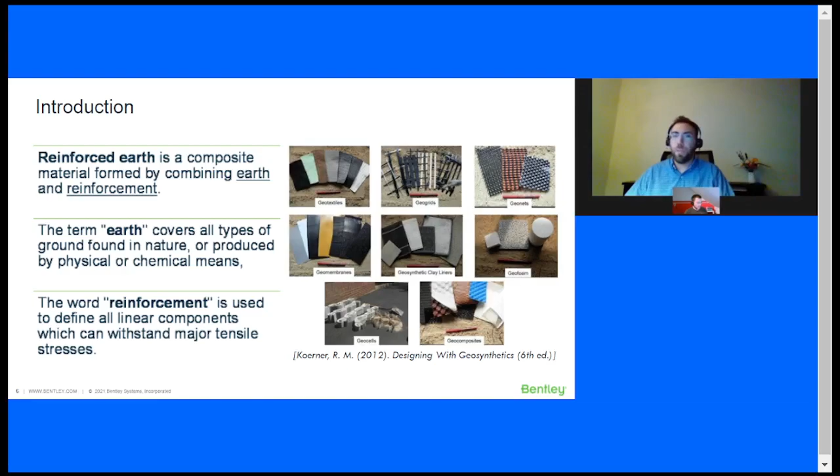One might assume that geosynthetics and their use are fairly new to the world, but that's very far from the truth. In fact, there are many findings that suggest inclusions of different materials mixed together with soils have been used for thousands of years by ancient civilizations. For example, Romans used natural fibers, fabrics, or vegetation mixed with soil to improve road quality, especially when roads were built on unstable soils.

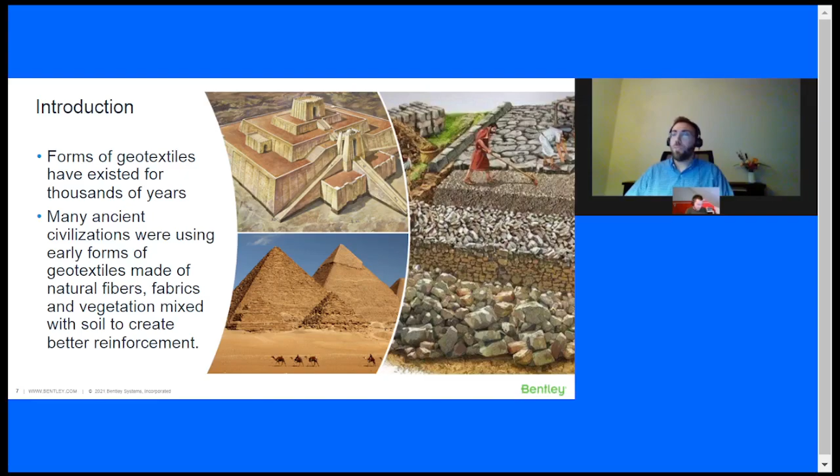The same was true for the Egyptians back in the days of the pharaohs, where they used woven fabrics to stabilize roadways and also incorporated straw mats in the foundations of their pyramids. Finally, the Babylonians, more than 3,000 years ago, used reinforced earth to build ziggurats. The story goes that one of the most famous ziggurats, the Tower of Babel, collapsed perhaps because it was not properly reinforced.

A fundamental problem these ancient civilizations faced was using natural materials such as wood and cotton. In a buried environment, they faced an issue called biodegradation, meaning microorganisms in the soil were slowly eating away these natural materials. Luckily, this problem was solved in the middle of the 20th century with the coming of polymer materials, which we know, when properly formulated and manufactured, can last for centuries even in harsh environmental conditions.

Since then, the usage of geosynthetics has increased rapidly in many fields of civil engineering, including geotechnics. The global market is expected to reach $22 billion by 2027. In terms of product, geotextiles dominate the global geosynthetic industry with over 70% of volume.

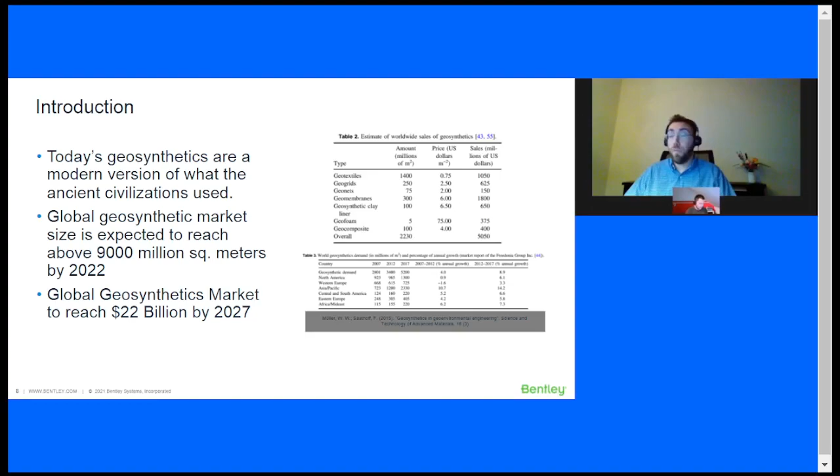As you already know, geosynthetics have many areas of application in civil engineering. They always perform one or more basic functions, as shown here, when used in contact with soil, rock, or any other civil engineering material. These functions are separation, filtration, reinforcement, barrier or containment, and drainage. As shown in the table, for any given application of a geosynthetic, there can be one or more functions it is expected to serve during its performance life.

In PLAXIS, the primary function that we typically model is reinforcement, shown here in darker green. In reinforcement, the geosynthetic develops tensile forces, and this development is intended to maintain or improve the stability of the structure. However, it is also possible to model barrier or drainage functions, but that could be a bit outside the scope of this presentation.

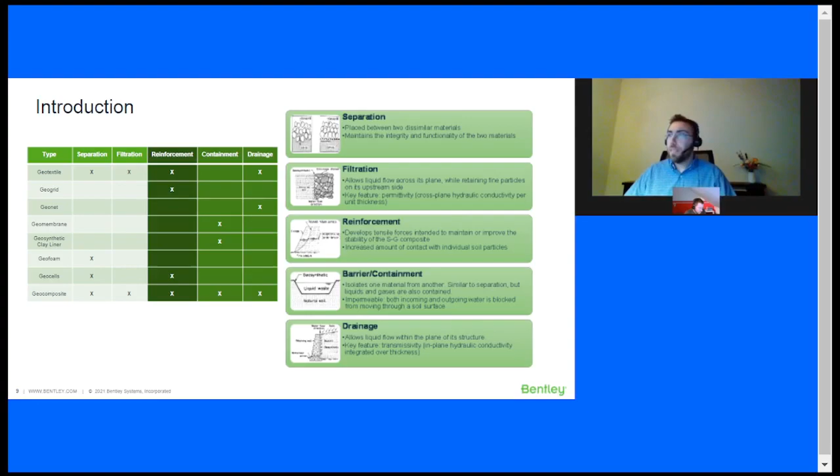With that, I'd like to ask you this question: if you are designing with geosynthetics, which functions are most commonly used for your design? The available options are separation, filtration, reinforcement, containment, drainage, or maybe some other. You can choose multiple answers if you want, and we'll check the results in the next slide. I'll give you a few more seconds to answer this.

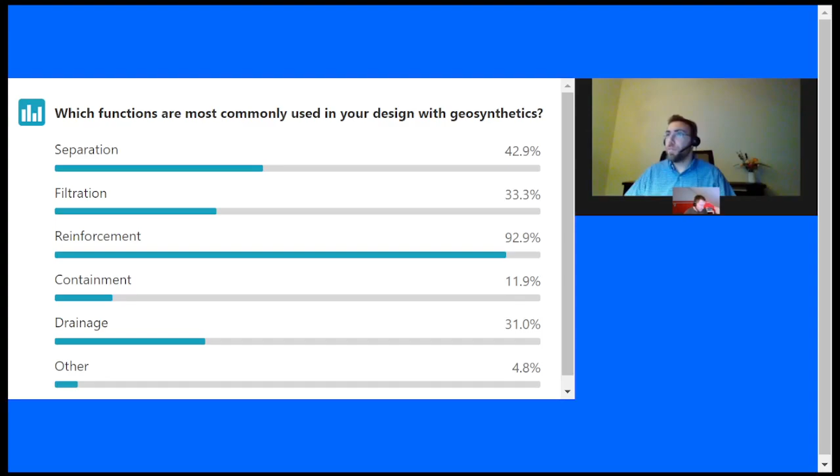Of course, reinforcement is the easiest function to model in PLAXIS, but as we said, we have other functions as well. Let's check our poll results. The majority of answers selected reinforcement, but we also have some high percentages for separation and drainage. We're going to see some of these applications afterwards. These are some nice results.

Let's see some common applications in civil engineering projects. The application areas of geosynthetics are numerous. One such application is retaining walls, or what we know as mechanically stabilized earth walls. Geosynthetic reinforced retaining walls consist of different geosynthetic layers as reinforcing elements, installed in the backfill to help resist lateral earth pressures.

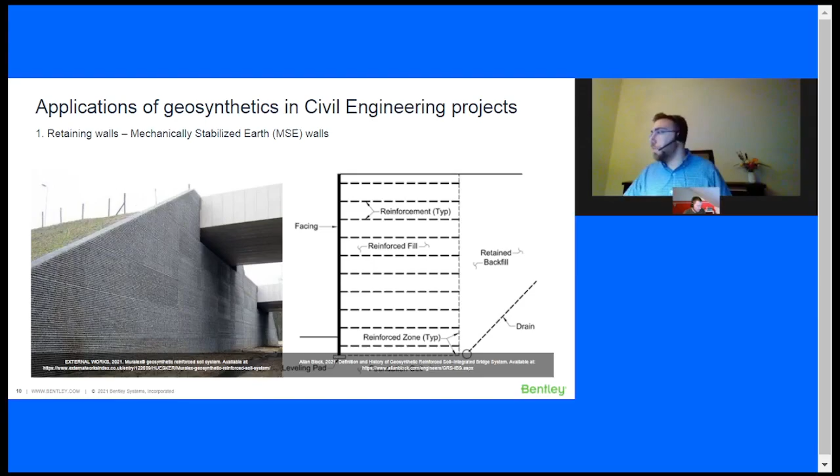The geosynthetic reinforced retaining wall has three basic components. First is the backfill material, usually a more granular soil. Second is the reinforcement layers, generally geotextiles or geogrid layers, though you can also encounter metallic strips. Last but not least are the facing elements, which are not actually necessary, but are used either to maintain the appearance of the wall or to avoid erosion between the reinforcement layers. We will demonstrate one such example later after this presentation.

With that, we can move on to embankments and slopes. As you may already know, the construction of embankments over weak or soft soils can really become a challenge for geotechnical engineers. In the conventional method of construction, we usually first replace the soft soil with a more suitable material, or else we improve it in one way or another.

This improvement can be done, for example, with preloading, with dynamic consolidation, with soil mixing or grouting, or maybe with pile foundations. Of course, these options can be time-consuming, costly, or both.

On the other hand, in slopes, we know that many of the stability issues that we face in most of our designs are usually related to the requirements to meet steep grades without having to construct a retaining wall. In the end, what we want is to reduce the land requirements and provide additional usable area near the crest and the toe of the slope.

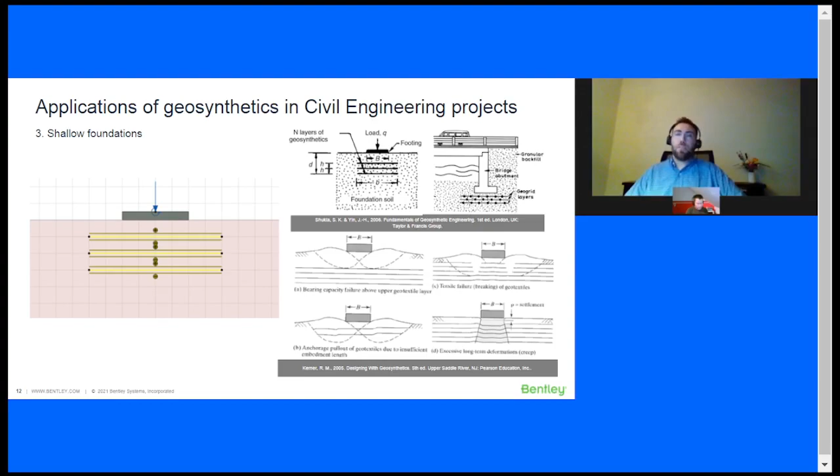Now, moving on to the shallow foundations, we know that the geosynthetic reinforced foundation soils are being used to support foundations for many structures. These structures can be footings, bridge abutments, platforms, heavy equipment, etc. In usual construction practice, one or more layers of geosynthetics are placed inside the controlled granular fill, which goes underneath the footing.

Now, the benefits of reinforced foundation soils are, first of all, the improved load-bearing capacity, and secondly, the reduced settlements. This happens because the imposed loads are distributed over a wider area. And normally, if we didn't have geosynthetics in conventional construction technique, we would need to have a thicker granular material, which can be costly or maybe sometimes not even possible in sites where the availability of granular materials is not easy.

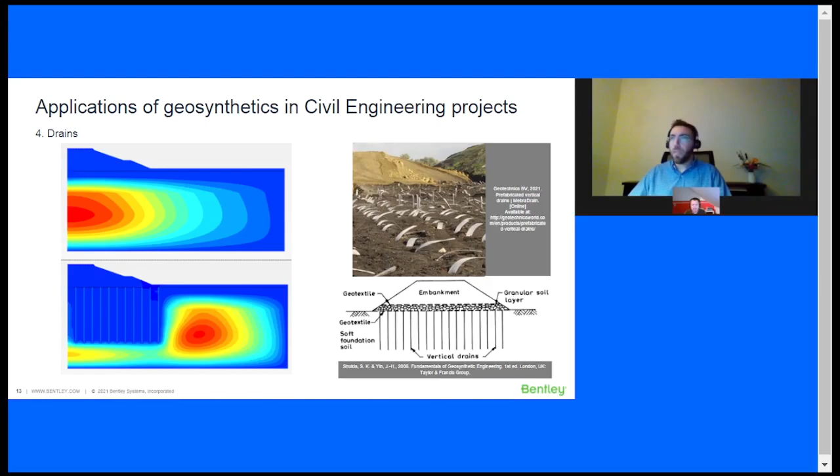And with that, we can move to the more practical part of this presentation, which is the determination of parameters. We know that by definition, the geosynthetics have a slender structure, which means that they can only sustain tension, tensile forces, but not bending or compression. Therefore, it is important to know the tensile properties of our material.

Tensile strength is usually determined by some sort of tensile testing. The most common one is the wide width strip tensile test, where we are gripping a geosynthetic specimen in the jaws of a tensile testing machine. And then we start stretching it in one direction at a prescribed constant rate of extension until that specimen breaks, or as we call it, ruptures.

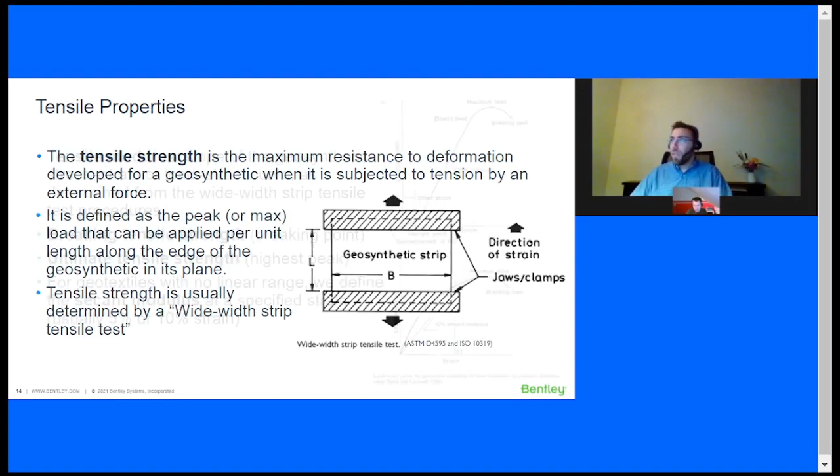Of course, we have many other tests that we can use. We have the grab test, the biaxial test, the multi-axial test, the plane strain test, etc. Now, during this extension process, we measure both load and deformation, and therefore we can derive at the end of the test some important parameters, such as the peak strength, the elongation, and the tensile modulus.

So starting with the tensile modulus, we know it needs to be considered in our design. Why? Because the geosynthetics need to actually resist tensile stresses under deformation. By definition, the tensile modulus is the ratio of the change in the tensile force to the corresponding change in strain. This is equivalent to the Young's modulus as we know it in other structural materials, such as concrete or steel.

You can see here on the top right, the figure shows a typical load strain curve for geotextiles. The tensile strength corresponding to the breaking points and the highest peak point are called the breaking tensile strength and the ultimate tensile strength, respectively. The slope of the load strain curve is the tangent modulus. And what we see here as offset modulus, which is on the linear part, is actually the maximum value of the tangent modulus, and it is obtained by calculating the tangent on the linear part of this slope.

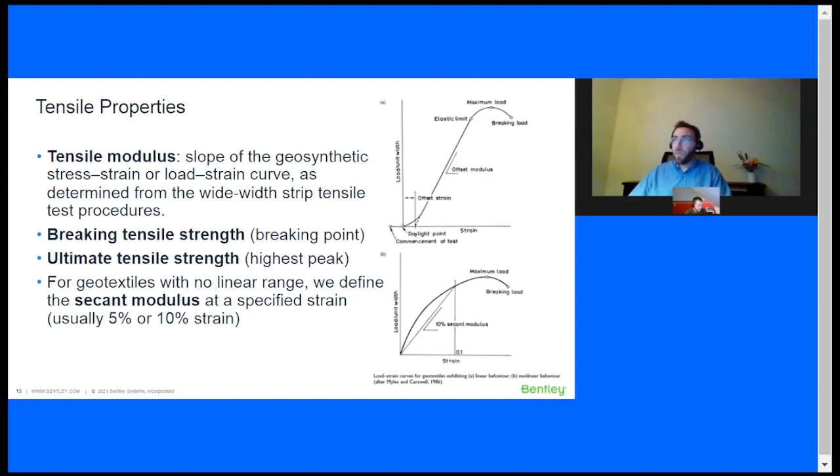Now we need to translate all this into what we use as input in PLAXIS. When we create a geogrid material in PLAXIS, we need to define a few parameters. The first is the material behavior. We know that a geogrid can be elastic, elastoplastic, or viscoelastic.

The second parameter is the axial stiffness, EA, which can be acquired either by testing, as we saw earlier, or from the product specifications. Usually, manufacturers provide material specifications for the product, and the properties are expressed as tensile strength, Tmax, and the elongation at failure. In that case, the axial stiffness will be equal to the tensile strength over elongation.

Last but not least, the third parameter is the allowable axial tension force in case of an elastoplastic material. When we are designing with geosynthetics and we want to consider its long-term strength, this property must be taken into account.

So what we traditionally do in our design is use a factor of safety approach. For example, for reinforcement applications, design codes use equations similar to the first equation we saw here, where we estimate the allowable long-term tensile strength by dividing the ultimate tensile strength by several reduction factors representing the soil, the strength loss due to installation damage, creep, and degradation, usually due to chemical or biological processes. For analysis procedures which incorporate the design factor of safety directly into the reinforcement, we use equation 2.

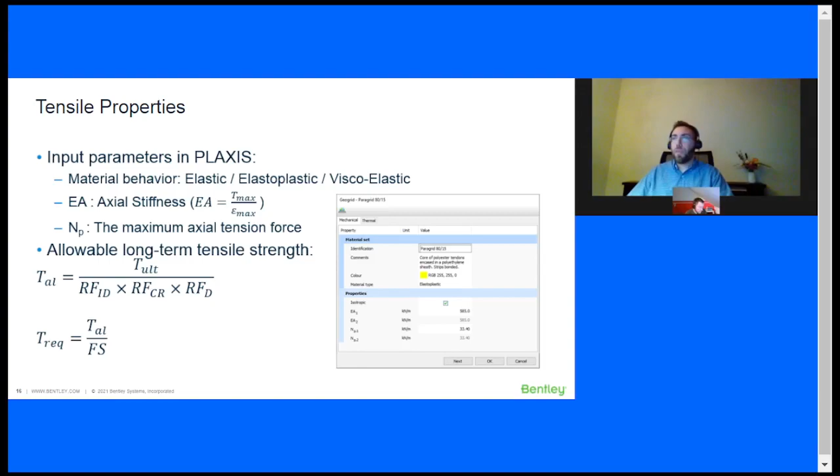Now let's talk about the interaction that happens between the soil and the geosynthetic. This interaction is really important, and we consider it a key element in the performance of the geosynthetic reinforced soil structure. It is important because the interface is mainly responsible for the transfer of stresses from the soil to the geosynthetic. In particular, for geogrids, we have 3 different interaction mechanisms that could be mobilized at the interface.

The first one is the friction that happens between the soil and the solid surface. The second is the passive resistance mobilized against the bearing member. And thirdly, as also shown here on the right side, it is the friction happening between the soil enclosed, meaning the soil in the gaps, in the openings of the reinforcement, and the surrounding soil.

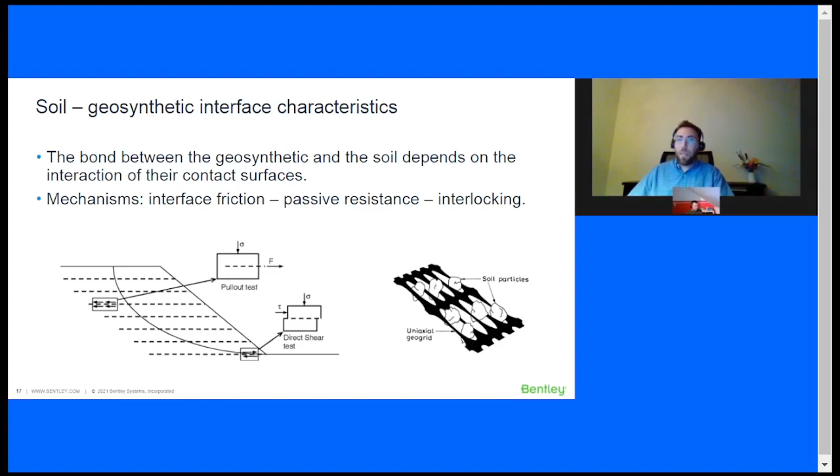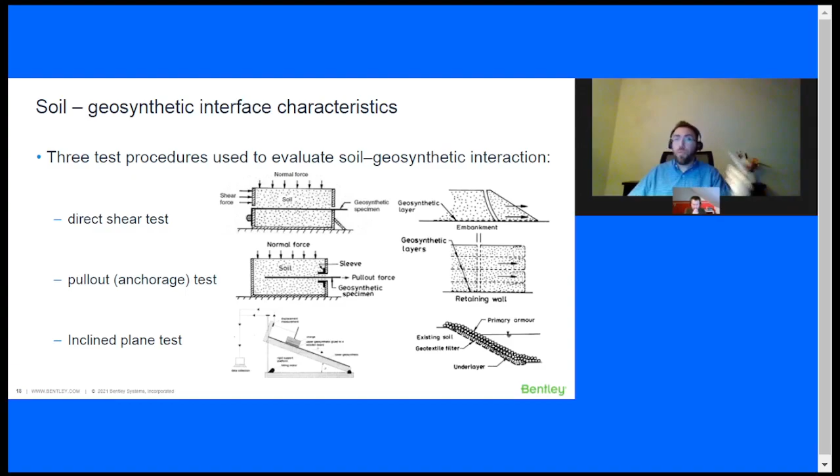Now let's apply this to our PLAXIS input. As you may already know, when we define a Geogrid, we can also create an interface that goes with it. Usually we model the roughness of the interaction by choosing a suitable value for the strength reduction factor, which most of you know as R inter. We do that by specifying a value at the interface subset of the material set that we have assigned to the surrounding soils.

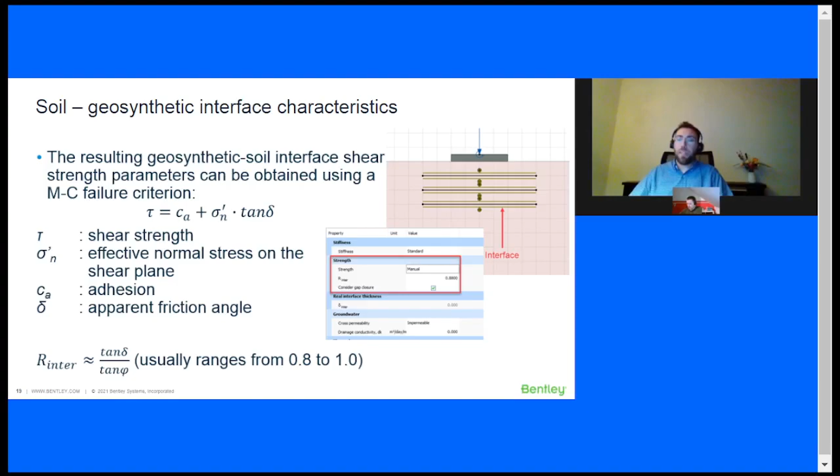Now, in PLAXIS, the shear strength parameters of the interface can be obtained using a Mohr-Coulomb strength failure criterion. However, in this case, instead of a friction angle phi and a cohesion C, the strength parameters are expressed in terms of apparent friction angle, delta, and adhesion, Ca. These are parameters determined with the tests we mentioned earlier. Therefore, the strength reduction factor becomes almost equal to the ratio of tangent delta over tangent phi, which some of you may already know from geosynthetic design as the efficiency of the geosynthetic.

Now, having said that, we understand that determining the correct parameters for our geosynthetics and their corresponding interfaces is really important, as we said, it's a key element. I'd like to ask you: in your designs, how do you usually determine these parameters? Is it through field testing, lab testing, or from the manufacturer's product specifications? Or maybe something else? We'll show the results later, close to the end of the presentation. I'll give you a few more seconds.

I know that the first two options are sometimes costly, so people tend to use the product specifications. I'll leave you a few more seconds, and then we can move on to the final part of the presentation.

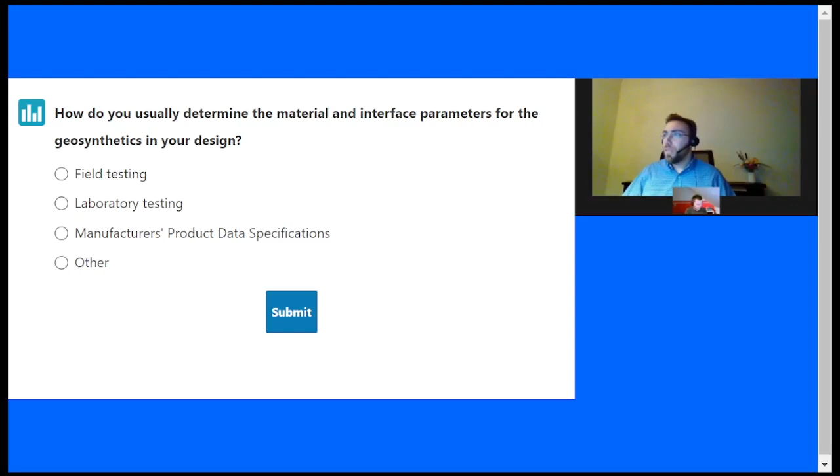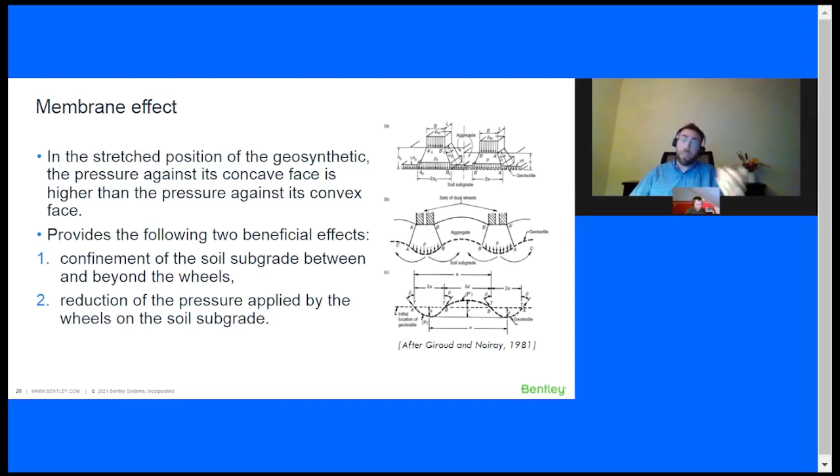The final part talks about the membrane effect. To explain it, consider a geosynthetic loaded laterally by a vehicle. On application of the wheel load, the geotextile exhibits a more wavy shape and starts becoming stretched. In this stretched position, the pressure against the concave face is higher than the pressure against the convex face. We know this mechanism as the membrane effect of the geosynthetic.

In short, geosynthetics that are initially straight may become curved due to lateral loading, and the higher the strain level in our analysis, the more apparent this effect becomes. To take this curvature into account and ultimately calculate the axial forces correctly due to the membrane effect, we need to activate the updated mesh option in the numerical control parameters. In simpler words, the updated mesh moves the nodes in the mesh to the new deformed location in every calculation step, then continues from there. This is different from the normal analysis, where deformation is always calculated relative to the initial, undeformed mesh.

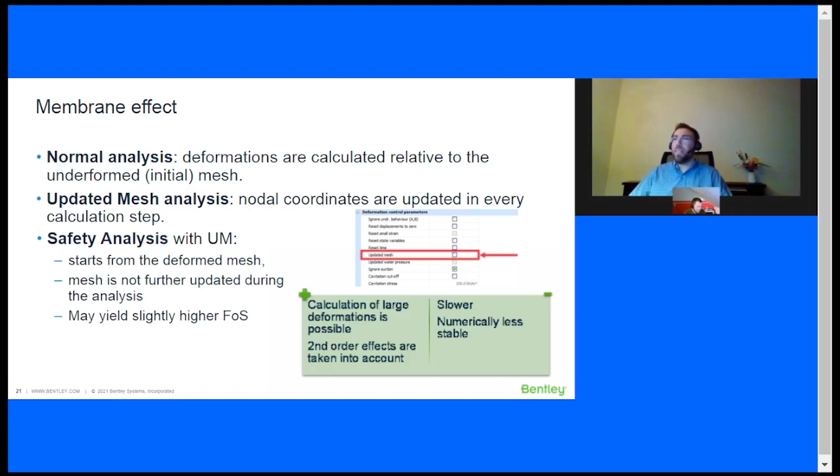Although an updated mesh is usually recommended for geosynthetic analysis, especially when lateral loading is present, due to the extra step of updating the nodal coordinates it can become slower, and sometimes numerically less stable. Finally, in a safety analysis, due to the consideration of the updated mesh and the more accurate mobilization of strength for the geosynthetics, the analysis could possibly yield slightly higher factors of safety.

With that, we can now see the poll results. As we can see, the majority of our attendants selected the manufacturer's product data specifications, which is expected. I think it's both easier and cheaper than performing lab tests.

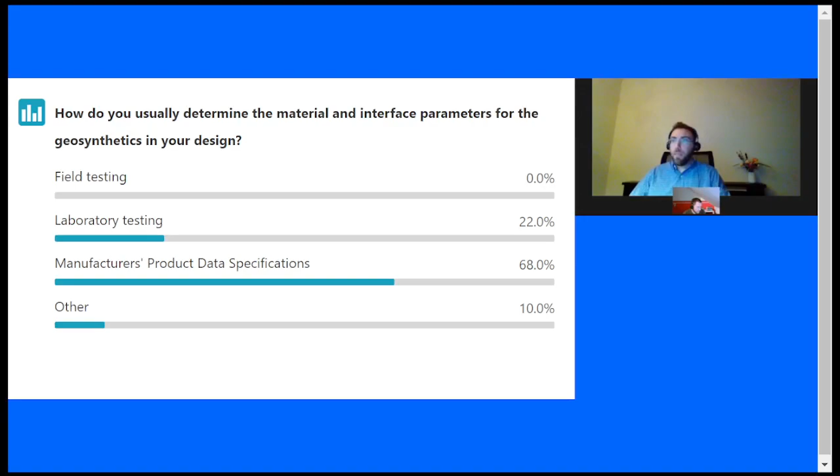And with that, we can now move to the second part of the presentation, which is the live demonstration of the design of a mechanically stabilized earth wall. So let's start with that.

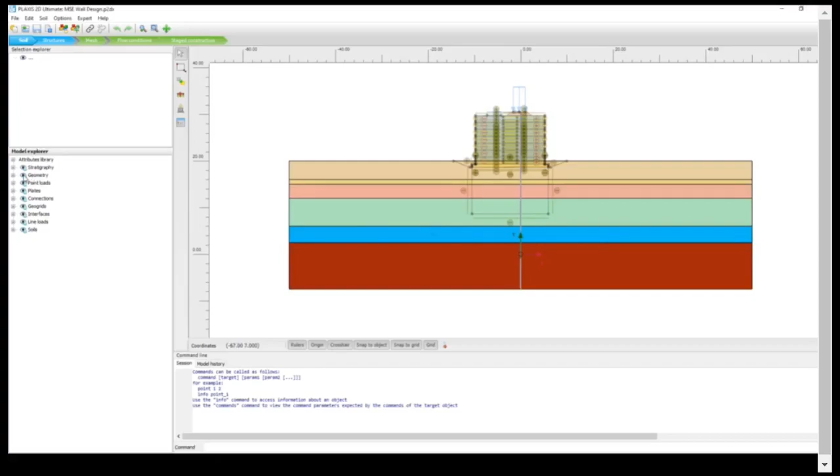All right, so we are starting our journey in the soil mode. Let's hide everything and keep only our soil layers. Here we have some mixed soil conditions with silty, sandy clay on the top 4 to 5 meters, followed by a clay sand and the silty sand. We also know that the phreatic level is approximately 3.5 meters below the ground surface.

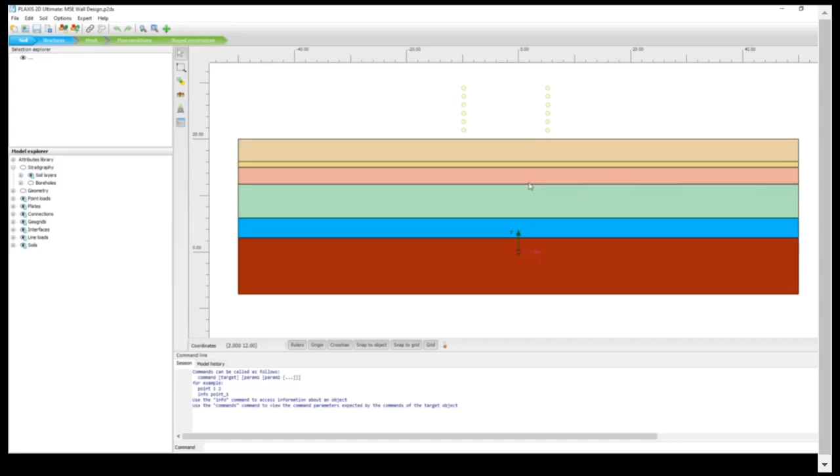Now, as this is a very soft ground, we suspect it won't be able to sustain the loads of the retaining wall we want to build on top. Therefore, we've decided to improve its mechanical properties in one way or another, which we'll show later. Now let's move to the structures mode. Here we can define the geometry for our problem. So let's show everything and then hide the lines and the points.

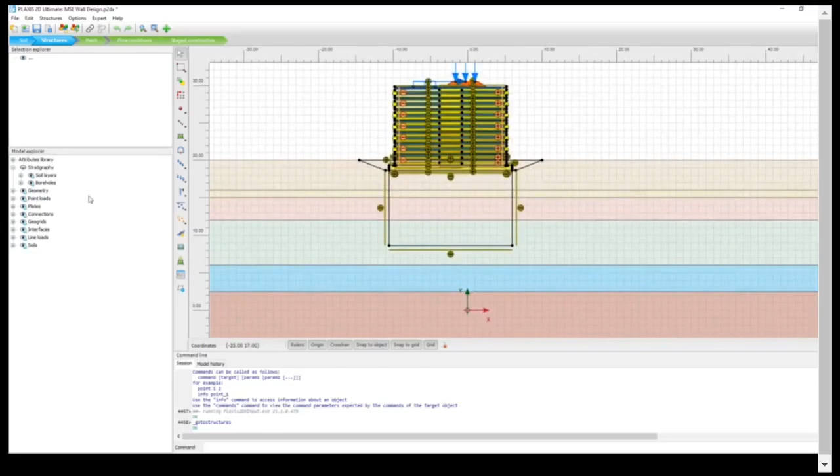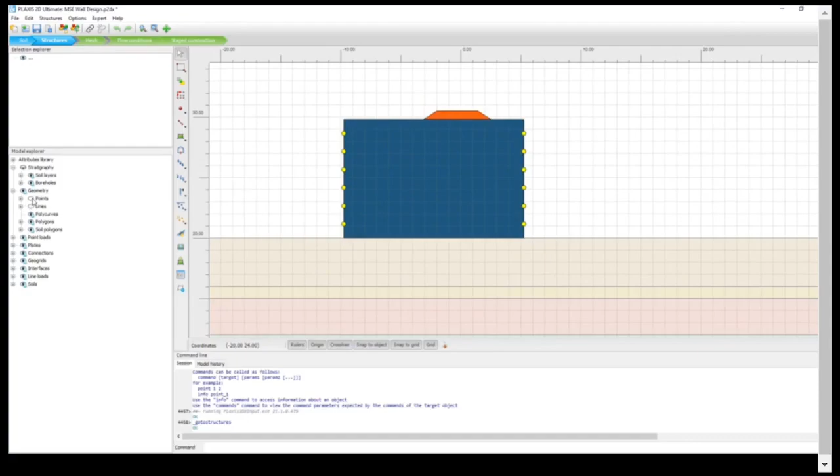Now let's show the rest of the geometry. To make it a bit more clear, I will hide the interfaces now. So if you look at the foundation of the MSE wall, you will see that we have drawn a box. This box represents the area that will be improved.

As we have mentioned in the presentation earlier, this can be done, for example, with soil replacement, soil mixing, maybe grouting or piles. No matter which method we decide to use, we need to create a new material which will represent the improved soil, and then assign it to this area, which we have drawn using simple helper lines.

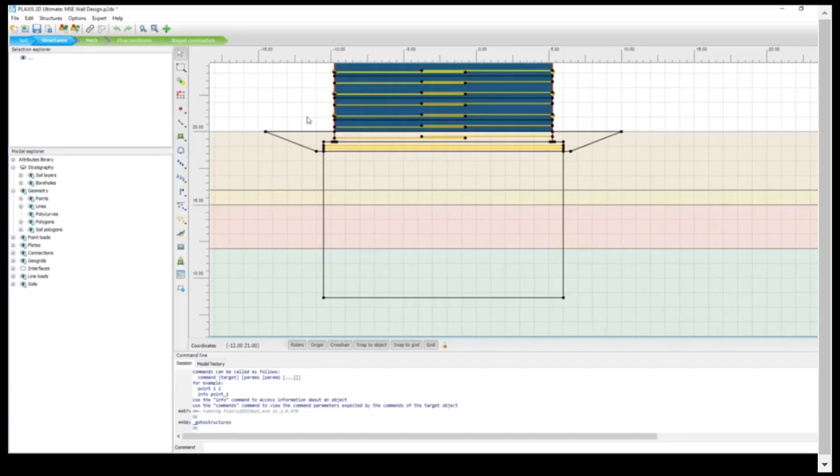Now, another cluster that we have drawn using the same helper lines is this trapezoid here, where we have excavated the existing problematic material and replaced it with a more suitable, more granular backfill material. Additionally, as you can see here, we have installed 2 layers of geogrids that will help us spread the imposed loads over a wider area.

So after we've done these steps, we can start building upwards. As we have mentioned, we have 3 basic components in our MSE wall. We have the backfill, and we have the reinforcement layers, which are generally geotextile or geogrid layers, but it's not uncommon to also have metallic strips.

And for that, in PLAXIS, we use the geogrid elements to represent the reinforcement in this model. And finally, we have the facing elements, which we have defined as plates.

As you can see, we have different colors for each set, which means we are using reinforcement elements with different properties. This is, of course, natural and expected because we want to make our design economic and safe. Therefore, closer to the base where we anticipate higher horizontal soil pressures, we are also using reinforcement with higher axial stiffness and ultimate tensile capacities.

Please forgive me for the colors that I've used in the model. I tried to select colors with high contrast, but as you can see, that didn't work all that well.

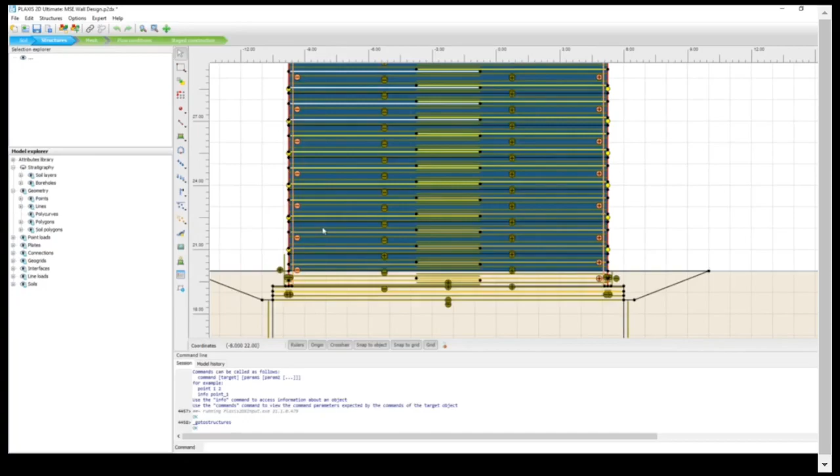Now, getting back to the geogrid materials, let's make the interface visible again. Each geogrid material has an interface, and this represents the soil reinforcement interaction. In this case, we have smoother elements, and after performing some pull-out tests, we have determined an R-inter of 0.8, which is, of course, a bit on the low side.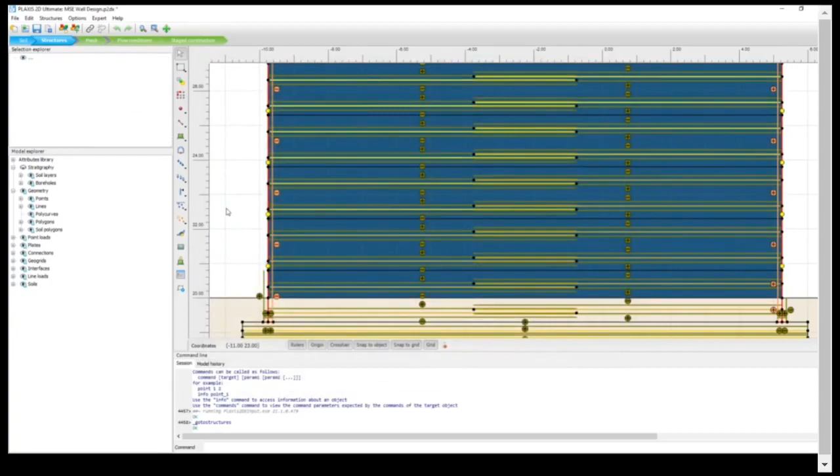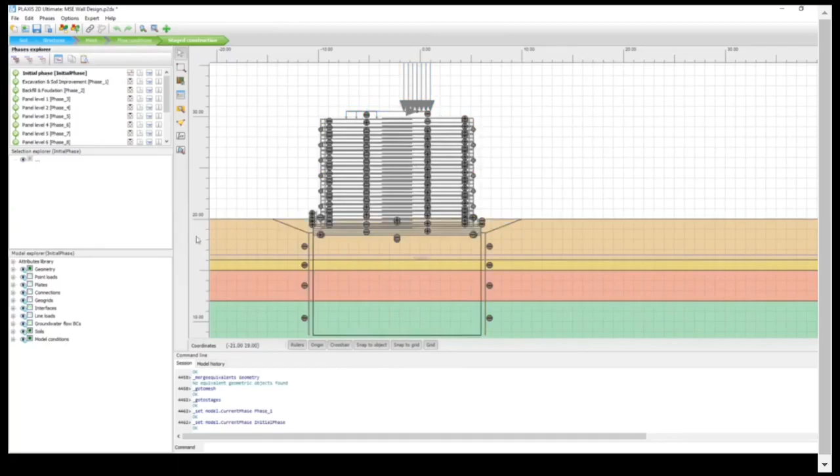So with that, after defining the geometry, we can go ahead and mesh our project. I've already done this step. And then we can move to the stage construction, where we start our initial stage with a K0 procedure, because we have horizontal layers of soil and horizontal phreatic levels. Our first phase represents the excavation and soil improvement stage.

Here we assign a different soil material with improved mechanical properties, as you can see here in gray. And depending on the improvement that we choose, it might be a good idea to also add an interface at the boundaries of this block to model the interaction which happens between the block and the surrounding soil.

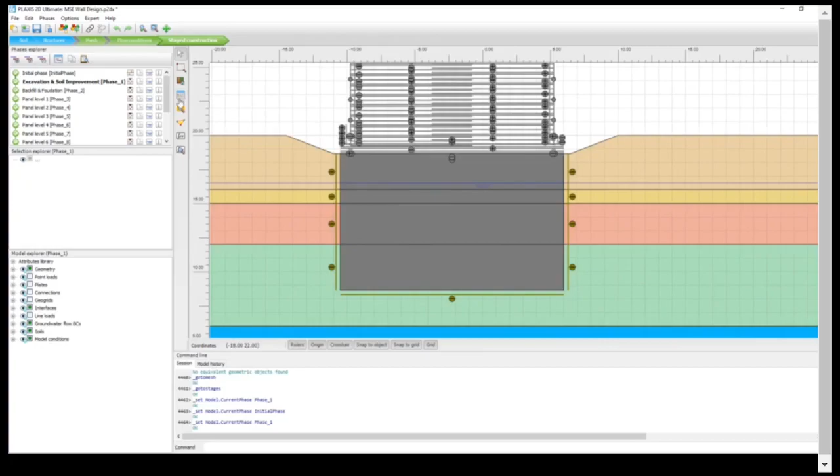Now let's move to phase 2. It is the phase of foundation. We have the backfilling and the installation of the 2 layers of geogrids at the bottom. And we are also activating the footing, foundation footings, and the first layer of face panels.

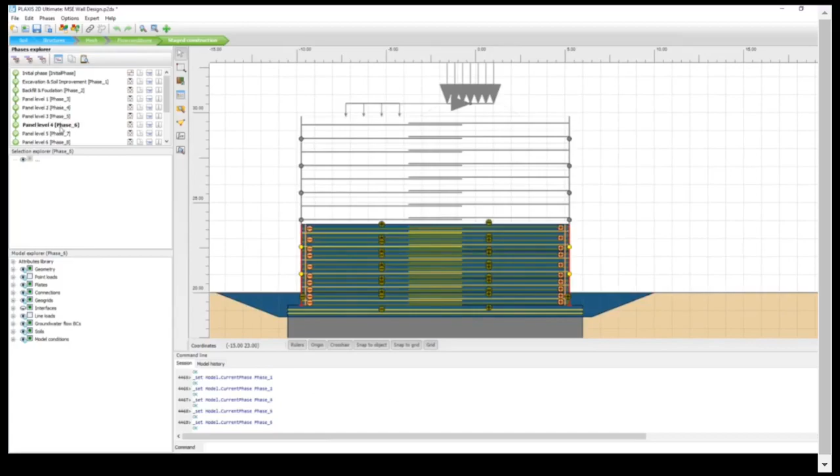And after that, we start building upwards by adding consecutive layers of backfill soil, reinforcement, and facing elements until we reach the top, which is 10 meters above the ground surface. And then we get to put the cherry on top of the cake, which is none other than the ballast embankment. Last but not least, we have the combination of loads at the top of the embankment and the MSE walls, which actually represent the traffic load as per our design.

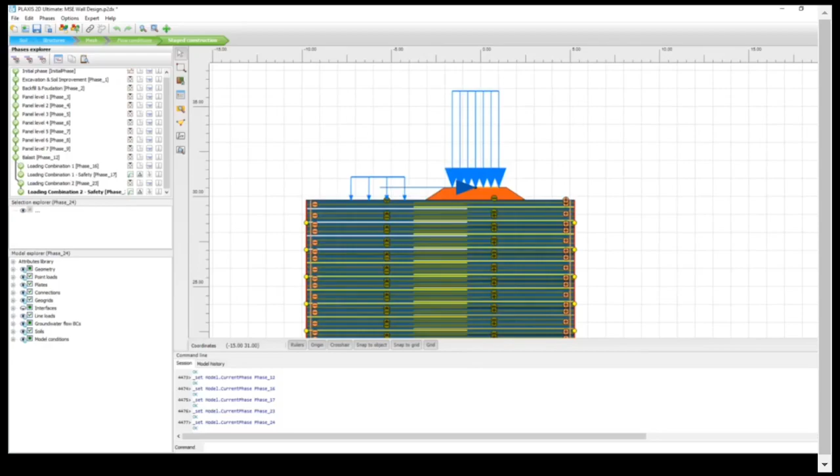After each combination, we are also running safety analysis, safety calculations to calculate the factors of safety. As you see here, I have completed the calculations beforehand. So we can go ahead and check the safety analysis first to see how our failure mechanisms look like.

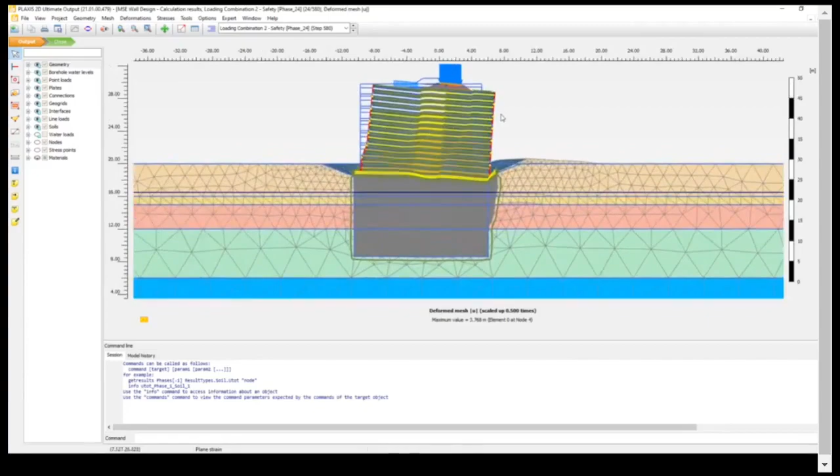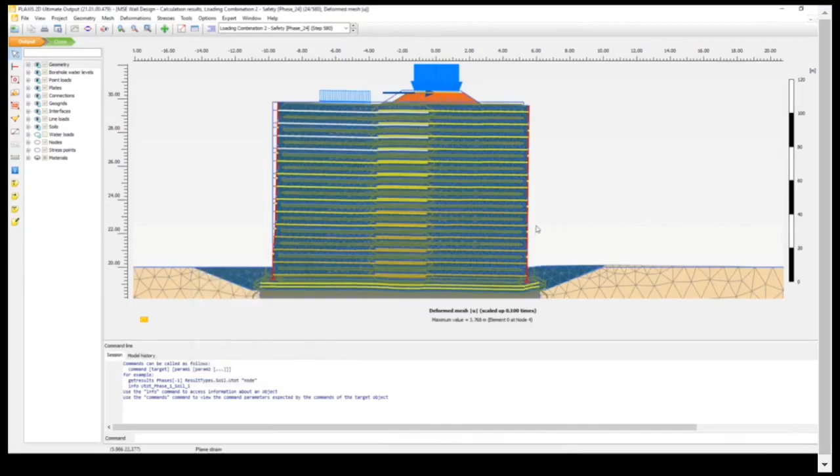Now, this looks kind of scary, I know. It's good to mention that the displacements shown in the safety analysis have no physical meaning. This is because when doing a safety analysis, the strength parameters are being reduced. Due to this artificial strength reduction, we are introducing out-of-balance forces in our model.

This out-of-balance will be solved by the calculation kernel, which will in turn result in more deformations. So these additional displacements that have been generated have no meaning, but what has meaning are the incremental displacements or the incremental shear strains, which will give us a good indication of the likely failure mechanism, as you can see here.

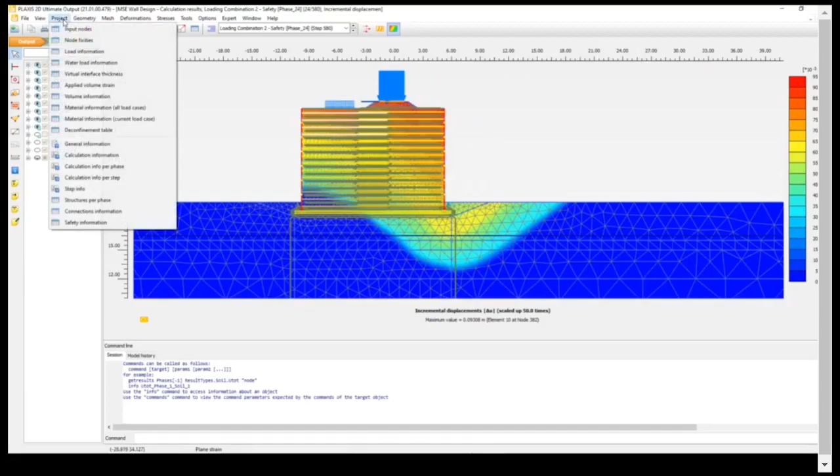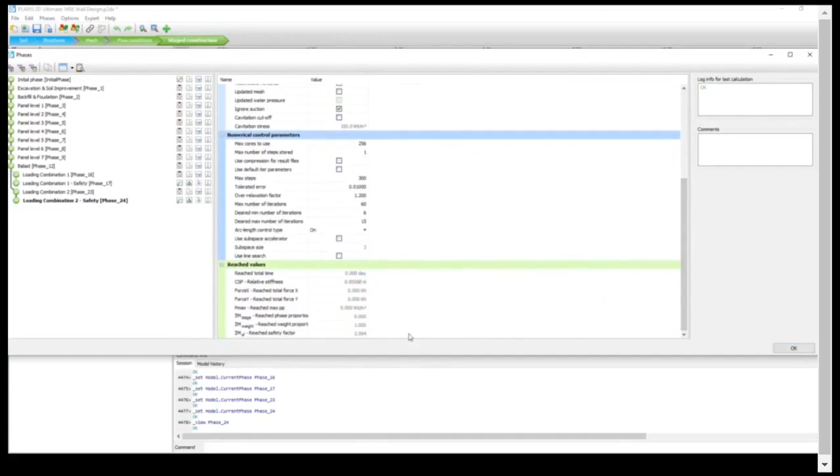So we can check now the calculated factor of safety. We can do it in two ways. One is through the project menu in the calculation information, as you can see here. And another way is to go back in the stage construction and double-click the calculated phase. And if you scroll all the way down, you will find the reached values, which in this case is approximately 2.09. And we're quite happy with anything above 2.

So we can go back to the output, and then you can show the results for loading combination 2.

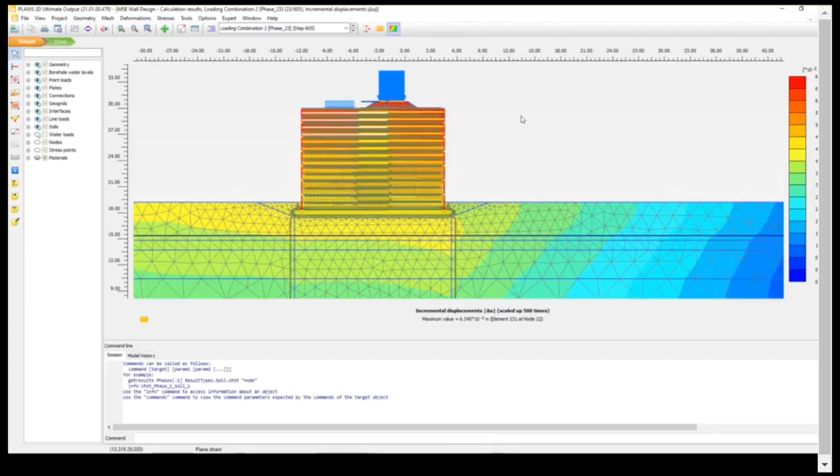Now from here, we get an idea of the type of deformation for our MSE wall. Let's increase the scale a bit. And as you can see here, there is a clear counterclockwise tilt of the wall and a distinct deformation near the right side of the foundation. Now let's change back the scale a bit again.

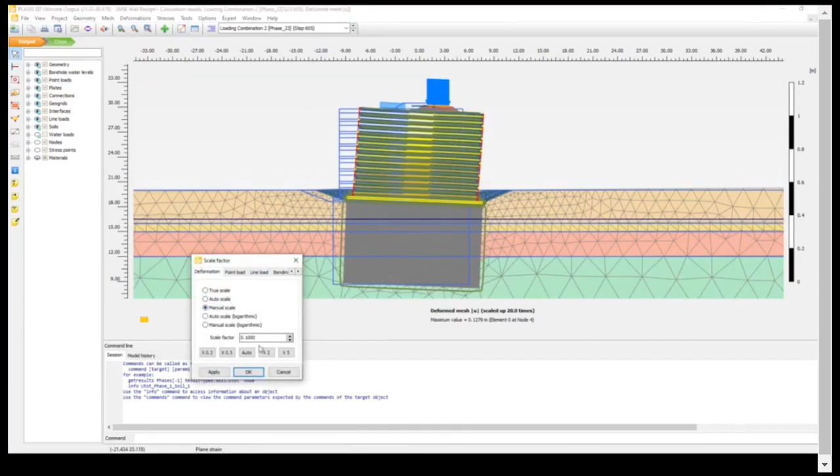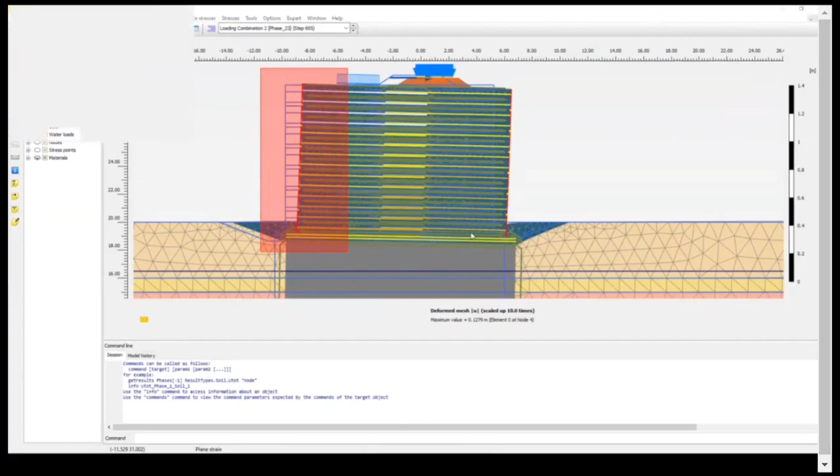So from here, we can check how well our geogrids have performed by dragging a selection window across the left side geogrids. As you can see here, I'm doing it from the bottom right to the top left, which means that I'm selecting any elements that have a part of it within that window.

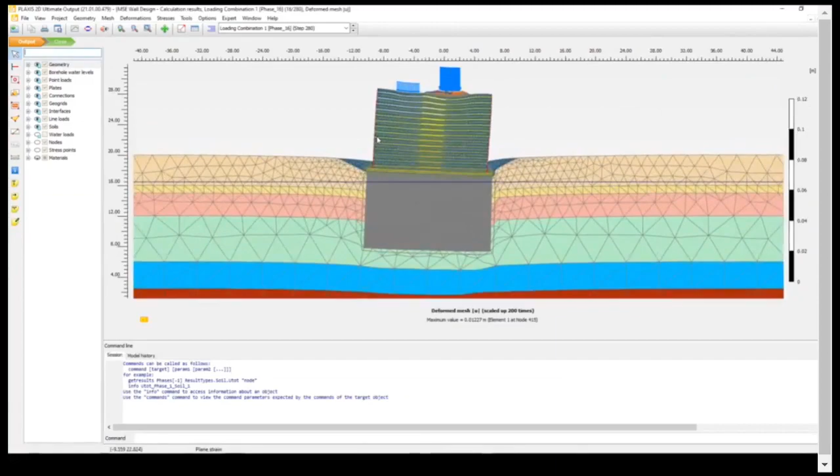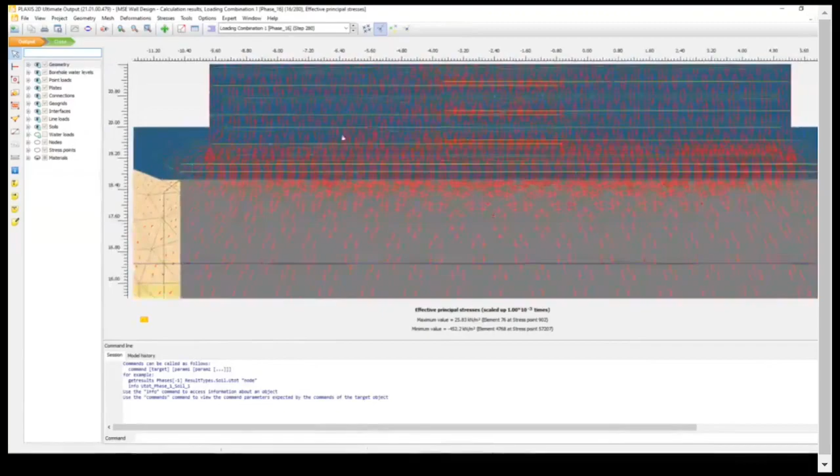Now let's close this and go back. Some additional information that we can check here are the principal effective stresses and their distribution close to the foundation. Let's scale the results down a bit. And we can see how the stresses from the weight of the MSE wall and the loading at the top are being distributed. And we can see also the direction of the principal stresses and how that changes a bit over here.

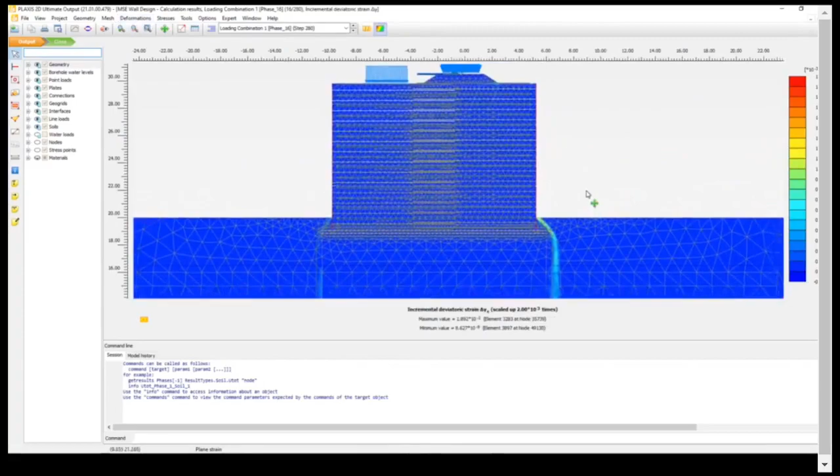Another parameter that is very critical in our understanding of the potential failure is the deviatoric strains, and more specifically, the incremental deviatoric strains. And as you can see here, we have a clear surface developing near the right side of the foundation, which extends to a deeper depth.

And we can observe something similar using the plastic points plot. Here we see that there has been some plasticity developed within the MSE wall, but also closer to the foundation and within the improved soil, as you can see here.

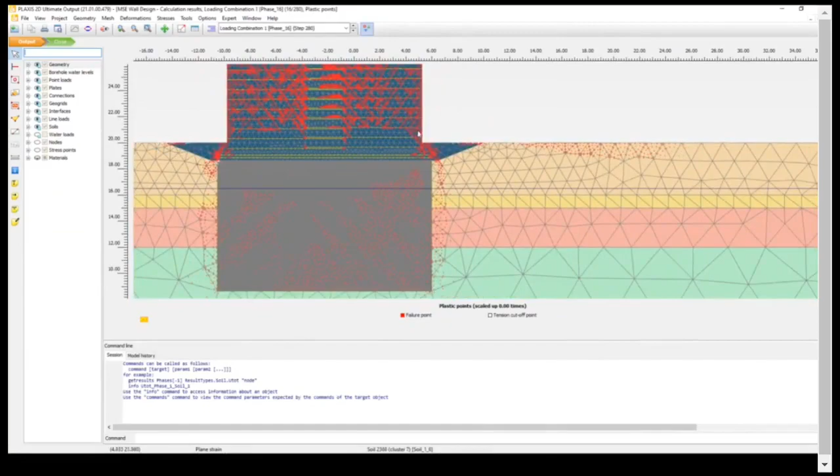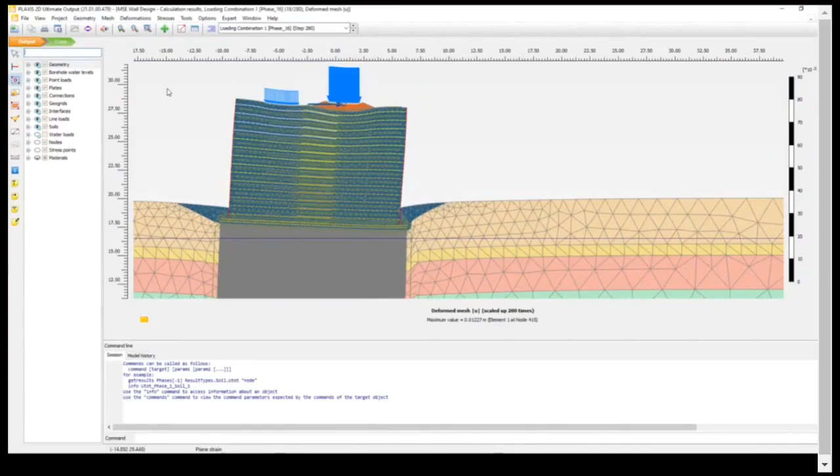So we can go back to the deformed mesh. And this time we can check all geogrids together to get a better understanding of the general efficiency of our reinforcement. This time I'm dragging a window from top left to bottom right. And with this method, I need to have the whole element within my window to include it in my selection.

So axial forces, and then I'll change the scale a bit. And you're going to notice here that the graphs from the left geosynthetics are plotted on top. And for the right geosynthetics, they are plotted at the bottom. This is related to how we draw the lines. So if we draw them from left to right, the plots will be on top. And if we draw them from right to left, the plots will be at the bottom.

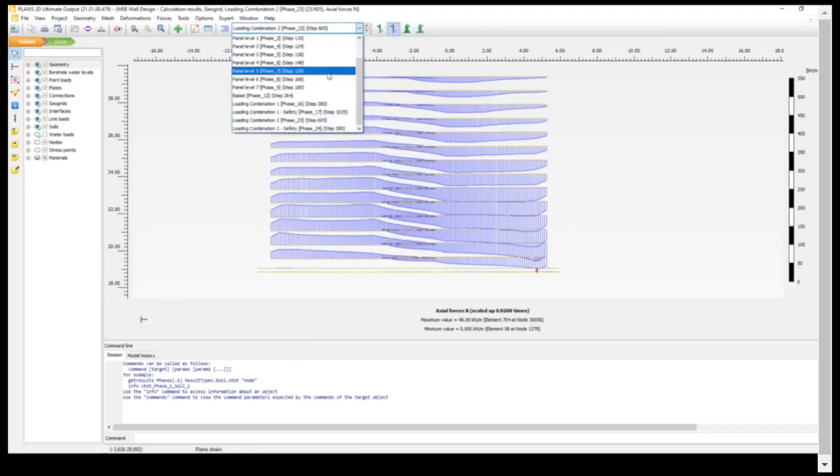For loading combination 2, the right side has higher axial forces due to the eccentricity of the load at the top, whereas loading combination 1 is a bit more balanced in terms of axial forces.

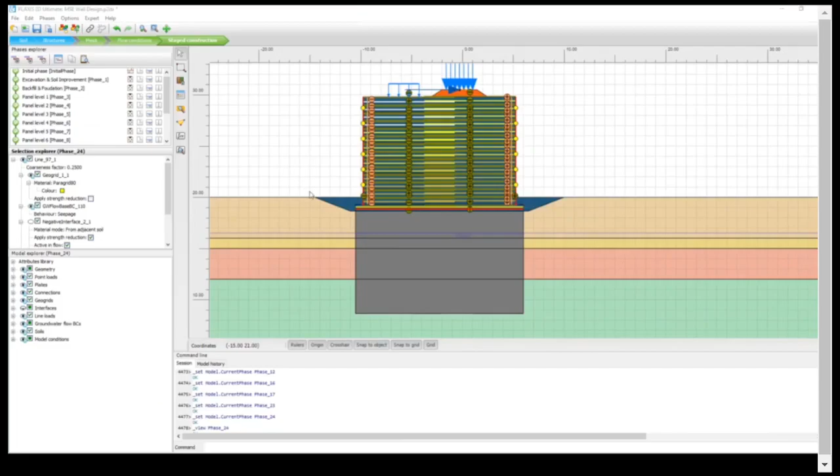Now we can go back to the PLAXIS 2D Input, and I forgot to mention a couple of things here. The first thing is that we can model specific connections between plate elements. We know that usually the facing plates of an MSE wall are free to rotate, so we can define the connection of two adjacent plates with hinges.

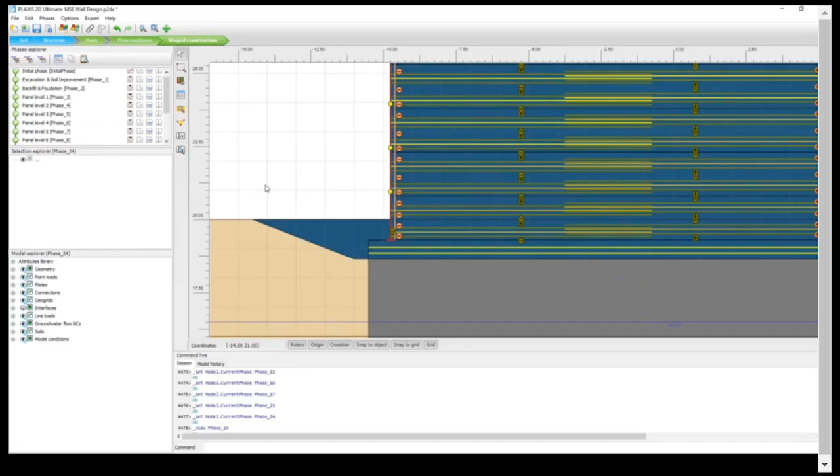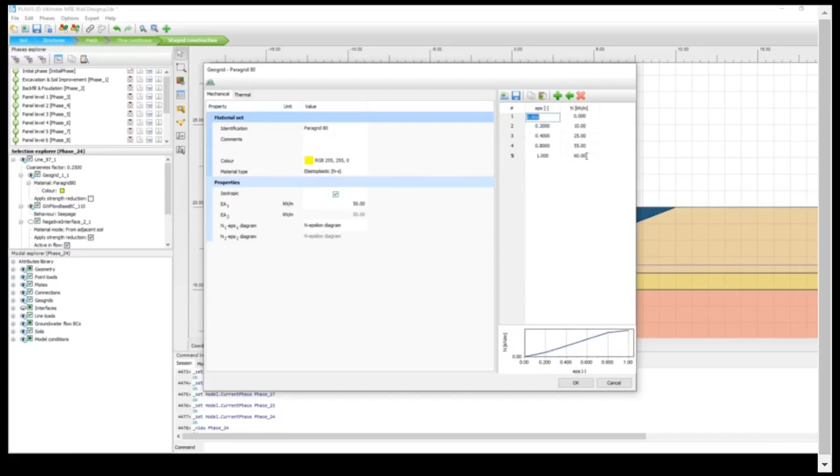The other thing I forgot to mention is that we can use a different elastoplastic material behavior. Geogrids can be modeled using what we have in PLAXIS as elastoplastic N-epsilon behavior. This material model allows the definition of nonlinear stress-strain behavior for geogrids. When defining this user-defined diagram, as you can see on the table on the right, the axial behavior of the geogrid is governed by the defined force and strain. Typically the first segment of the N-epsilon diagram determines the geogrid's initial axial stiffness, and the additional segments define the geogrid's nonlinear elastoplastic behavior. The last defined N value is assumed to be the ultimate tensile strength at which the geogrid fails.

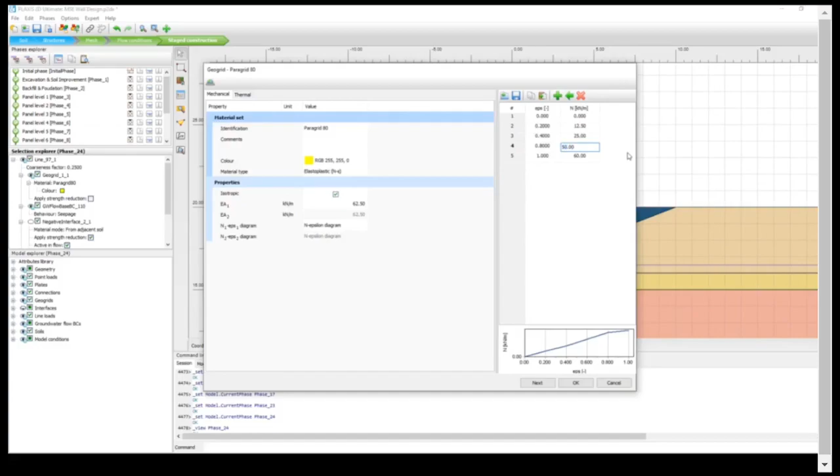Now I've put some random numbers here, and if you watch closely, PLAXIS will not accept these values because I've put them in an increasing rate of change instead of a decreasing one. So I need to make a couple of changes in a few values. I will change this back to 0.5, and again it will not accept it because I need to change this also. And this time it will be OK.

This numerical modeling gives us the advantage of avoiding the difficulty of computing the geogrid axial stiffness, which depends on the strain level and the loading application time. Therefore, the axial stiffness is updated automatically at each iteration in the numerical model.

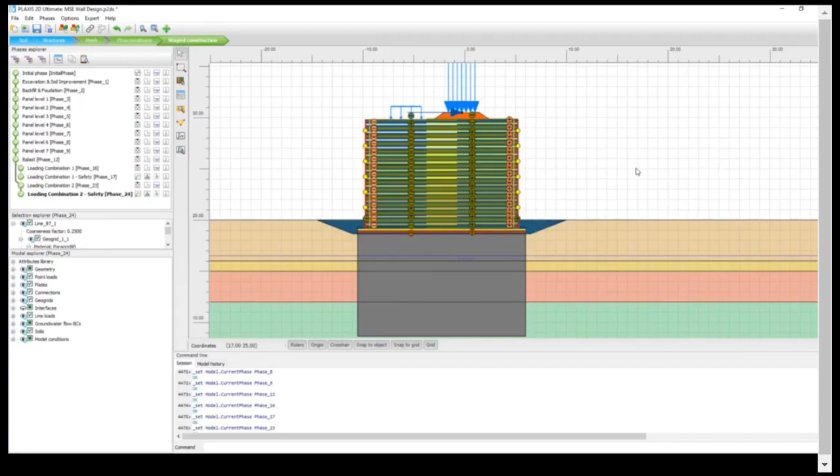And I think with that we have concluded the demonstration. We can move to the final slide, which is this summary.

So far, what we've seen is that reinforced soil structures have a long and successful history. Modern geosynthetic reinforced soil structures offer great flexibility. We know that in PLAXIS, geogrids represent slender elements, meaning they have axial stiffness but no bending stiffness, so they can sustain only tension. Finally, it is really important to determine the mechanical properties and characteristics of the interface correctly before we start our design. We've also seen cases where an updated mesh is usually important.

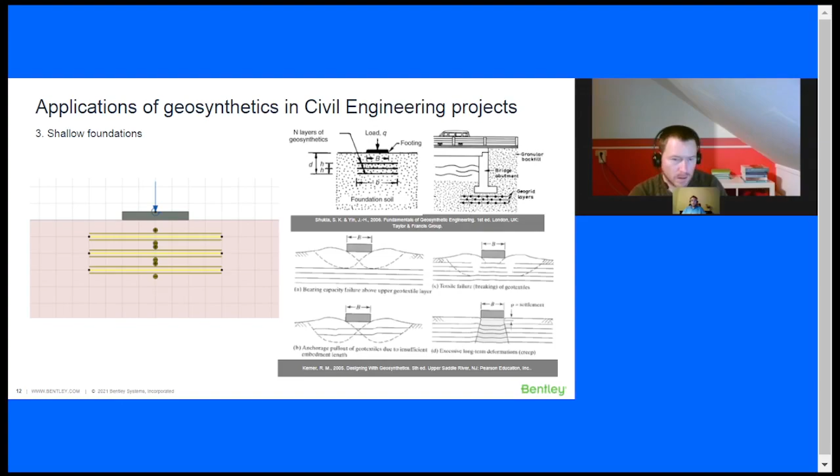Yeah, of course, this is a very simple case that I made to make a few checks.